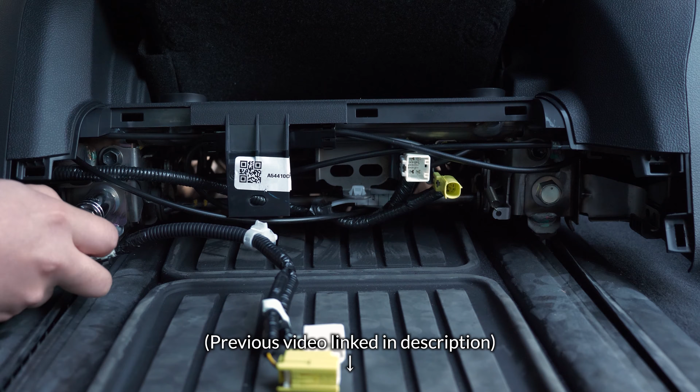Hey everyone, in my last video I showed you how to physically remove the 4th gen Toyota Sienna's second row seats so that you can carry extra cargo or camp in your car, etc. I mentioned that the seats actually have airbags in them, which is why we had to temporarily disconnect the battery before unplugging them from the car.

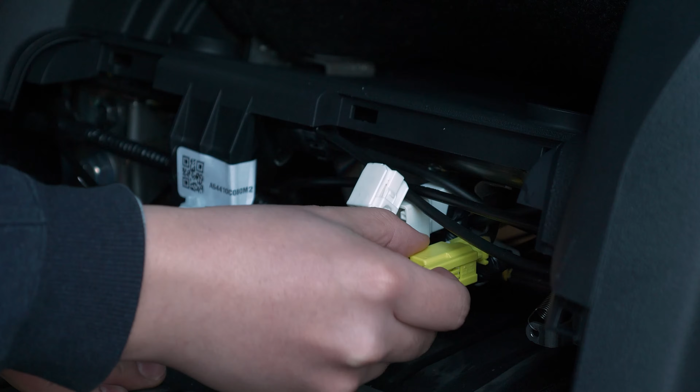I've also heard some people say that whenever one or more airbags are missing, the whole airbag system stops working. I haven't been able to verify this, but I'm going to err on the side of caution here and assume it is true. The rest of this video goes into how I came up with a solution. If you only care about the solution itself, look no further than this airbag simulator dongle I designed. Just plug it in and it'll make the error go away and make sure your airbag system works like normal. To remove it, just push down on this tab here and pull it out, just like Toyota's original connector.

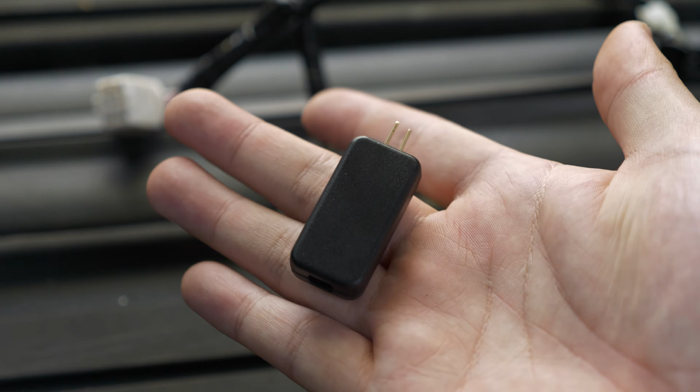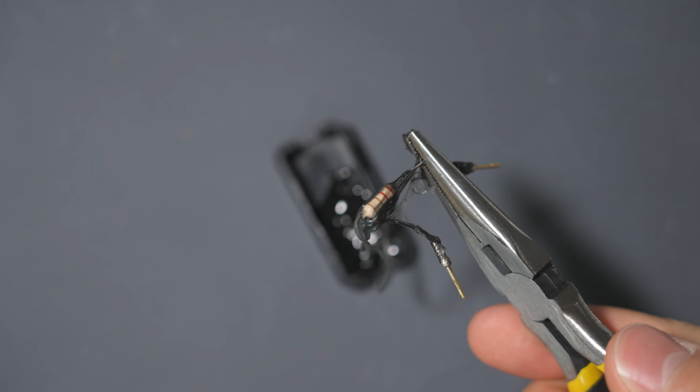I found a couple of pre-existing products for this purpose. The first one is this generic airbag simulator dongle sold on Amazon, eBay, etc. Glued inside its plastic housing is simply this 2.2 ohm resistor. Unfortunately, both its pins and its body are too thick to plug into the Sienna's connector. So I tried plugging a resistor directly into the connector. It worked, but the connection was too loose, and I noticed that the airbag warning message came back sometimes.

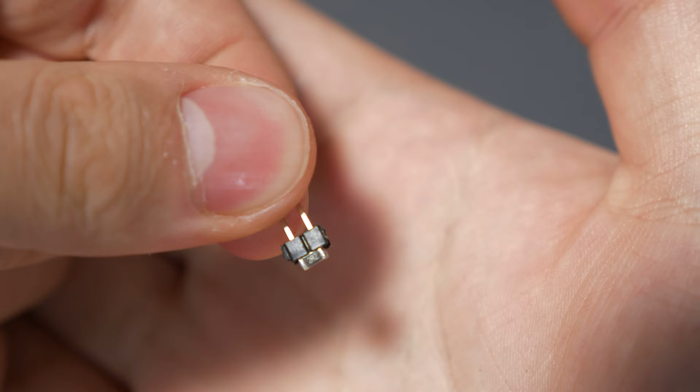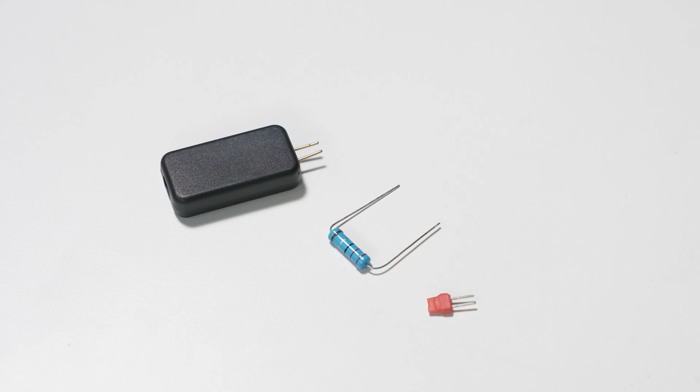I also found this tiny thing from an eBay seller in Poland. It took a few weeks to arrive to my US home, but it did work pretty well. Inside this heat shrink tubing, it's actually an SMD resistor soldered onto a pin header. I liked this one the best, but it was so tiny and finicky to plug and unplug and kind of janky. One common problem all these solutions have is the lack of positive locking. This means all of them can be simply pulled straight out at any time by anyone.

For something important like an airbag system, you'd want some positive locking mechanism that requires a specific set of steps to disconnect, so that any successful disconnection can only be intentional. I think this is especially important for the Sienna since you've got the wire harness sitting out in the open in a cabin that may be occupied by young children or guests.

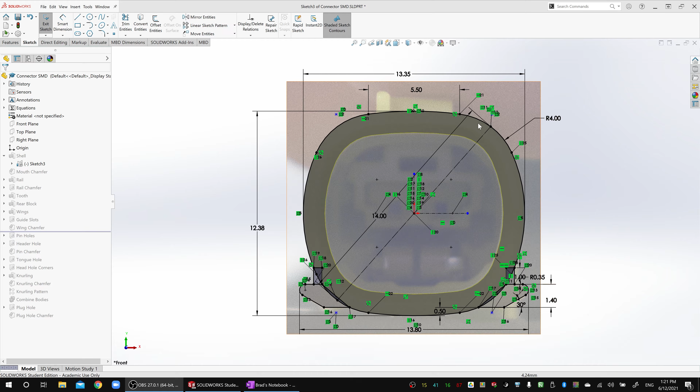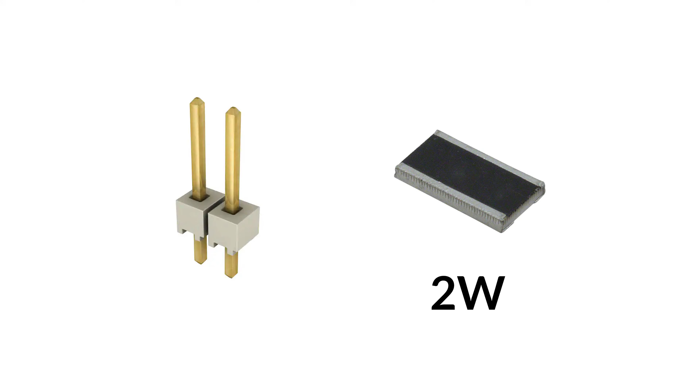To make my positive locking airbag simulator, I first measured the geometry of the connector that Toyota uses on the seat. I used a photo of the connector to guide me in recreating its shape in CAD. I took inspiration from the Polish product's use of a pin header and SMD resistor, but I chose to use a longer pin header and a physically bigger resistor rated for 2 watts to make it more robust. I created these pinholes and the slot for the pin header to install into. I chamfered the pinhole's entry point to help it self-align.

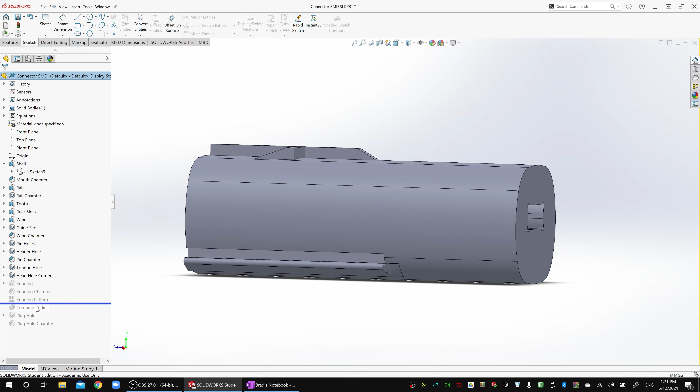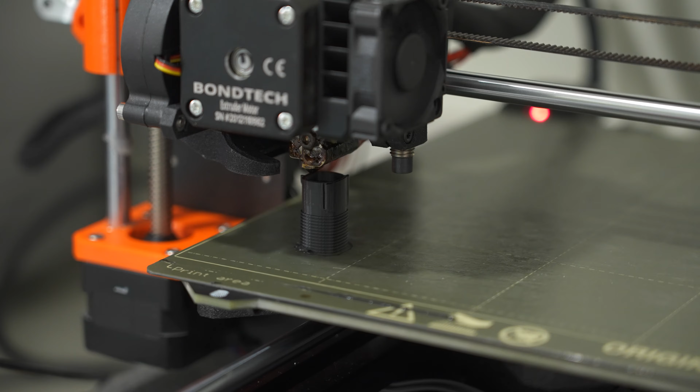I dog-boned the corners of the header slot to counteract FDM's natural tendency of rounding inner corners. I added this knurling-like pattern on the rear of the dongle to make it easy to grip and unplug. Initially, I planned to use glue or sealant to seal the back of the resistor, but manually injecting it was messy and time-consuming, so I designed this circular hole and this TPU plug that simply gets pushed in for a watertight seal.

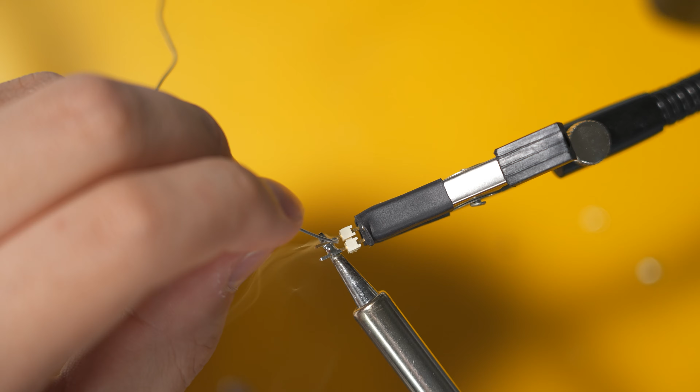I print the shells from Prusament PC Blend, which is a polycarbonate-based plastic mixture that withstands high temperatures and UV radiation. Great for automotive use. It's surprisingly easy to print, and the quality is superb. I solder the resistor onto the pin header and press it into the slot. I check that the resistance is still correct. Then I plug it up.

So that's how I make these airbag simulator dongles for the 4th gen Toyota Sienna. They'll probably also work with other vehicles that use the same connector, but I've tested it with only the Sienna. If you find this useful in some other car, please let me know in the comments.